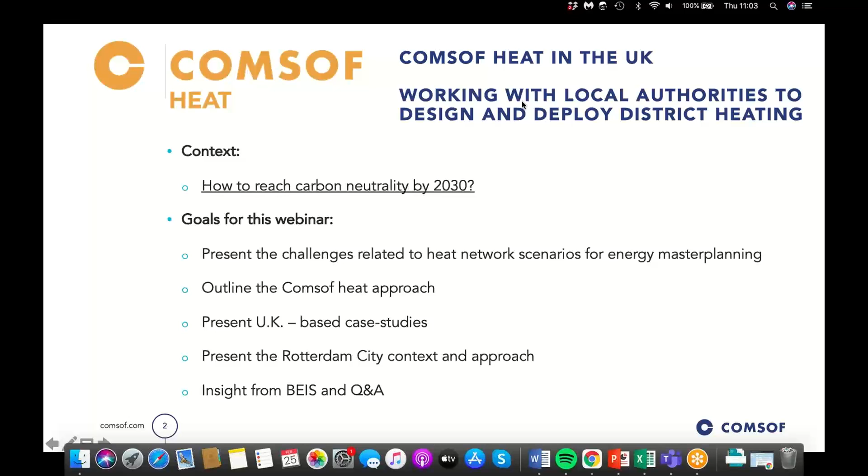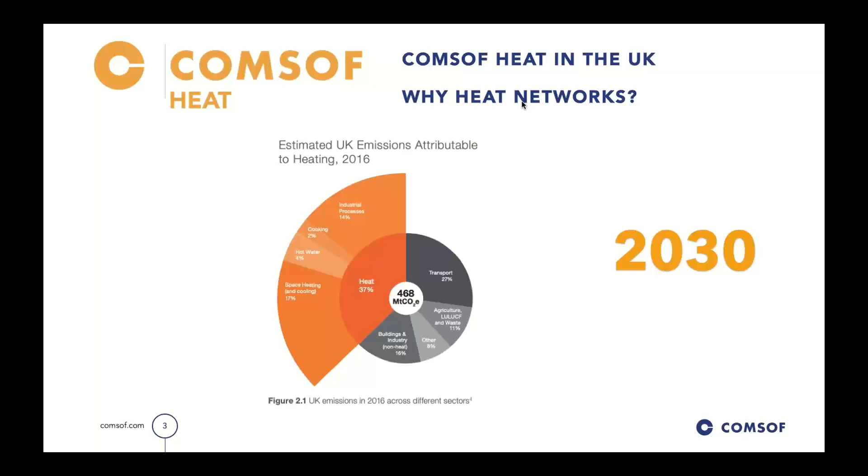So in the UK, heat accounts for over a third of all emissions. Space heating and cooling is 17% of that. And once again, that really does put into context how important it is that local authorities and the economy as a whole decarbonizes. And if we think about 2030, if this decade of ours was a 10-round boxing match, the first round's done, and unfortunately we were all a bit on pause. We now need to move ahead with some level of swiftness to start really making a difference, and that can be done in many ways.

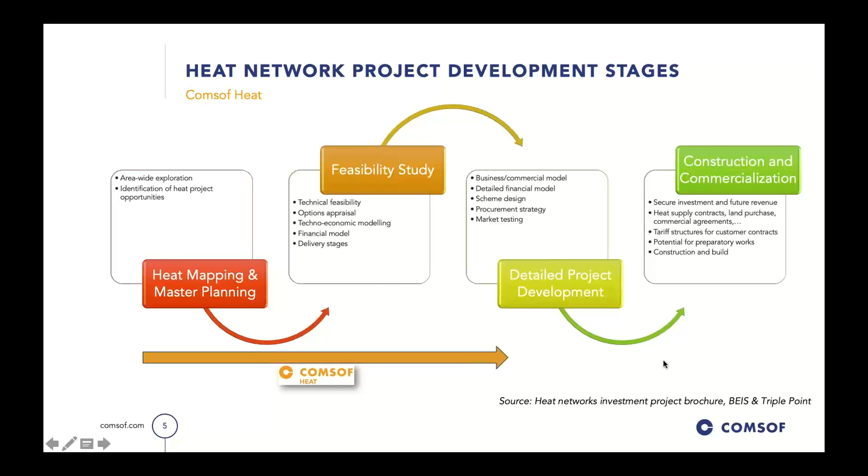Next, please. So if we look at the heat network project development stages, and this is a diagram from BEIS, we see the first 2 stages, heat mapping and master planning, and feasibility study, that's where Comsof is very valuable. And if you click, you will see the animation. So Comsof is there in the beginning, the first 2 stages, and it can also serve as an input for the detailed design in step number 3. So next slide, please.

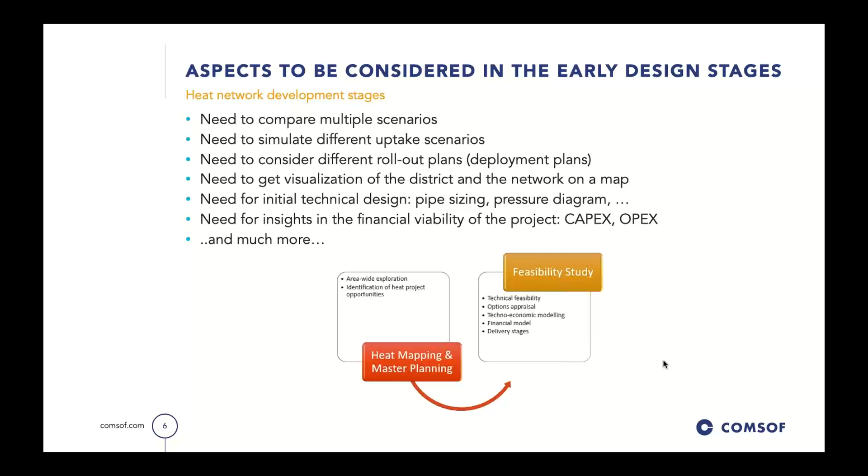So if we look at what needs to happen in these stages, basically you want to compare multiple scenarios, simulate different uptake scenarios, look at possible rollout plans. You want to have good visualization, you want to design your network. So this is all possible with Comsof Heat, as you will see in the case studies that Ben will present.

Now, what are the alternatives? How do engineering and consulting companies, which I've talked to, work? Of course, not all of them do it in this way, but typically they have some kind of in-house development of a tool for sizing, for planning, for cost calculation of a new network based on Excel, maybe with some Python development, some minor GIS integration.

So we have tried to bring it all together in one tool, make a scalable tool. Scalable means it can serve for small projects, let's say 30, 40, 50 buildings, up to 100,000 homes, as you will see, which is a case in Rotterdam, but also scalable in terms of training extra people to get on the software, to work with the tools. So you can easily train multiple engineers in your organization to start using the tool.

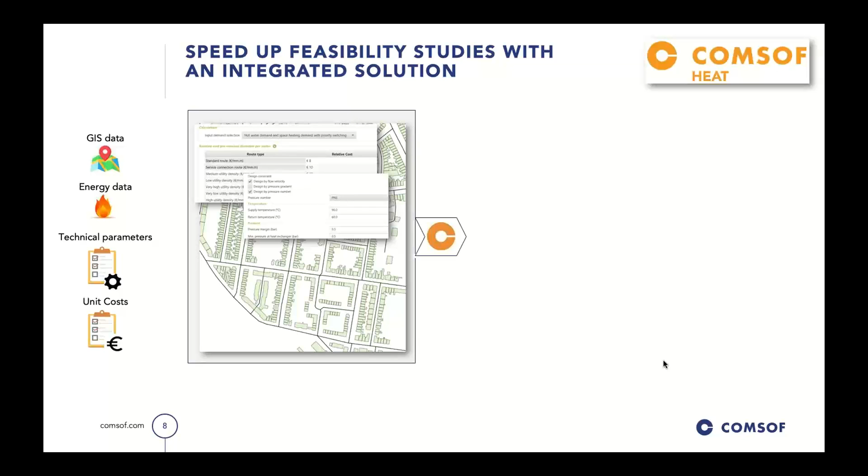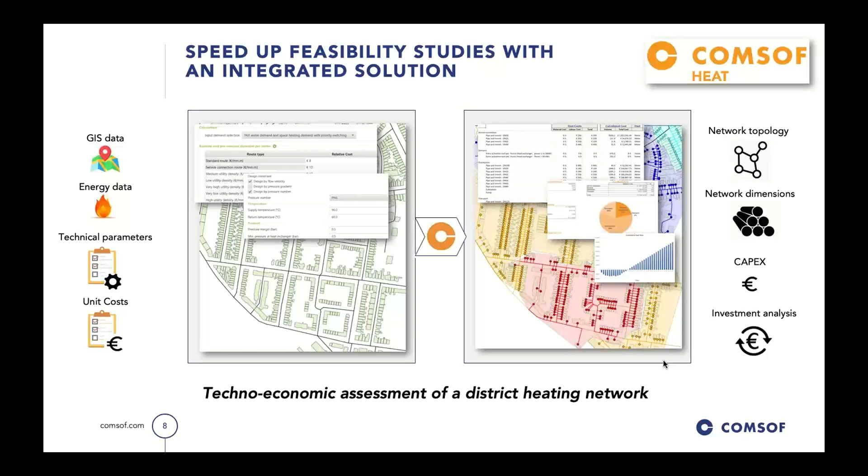So as an input, what do we need? We need GIS data, energy demand data, technical parameters for your design, unit costs if you want to calculate a deployment cost, and that's a starting point. Then what will our tool do? It will generate the network topology, size the network, calculate the deployment cost, and if you want, you can also look at investment analysis of a project over a period of 30, 40, 50 years. So in fact, it gives you a techno-economic assessment of a district heating network.

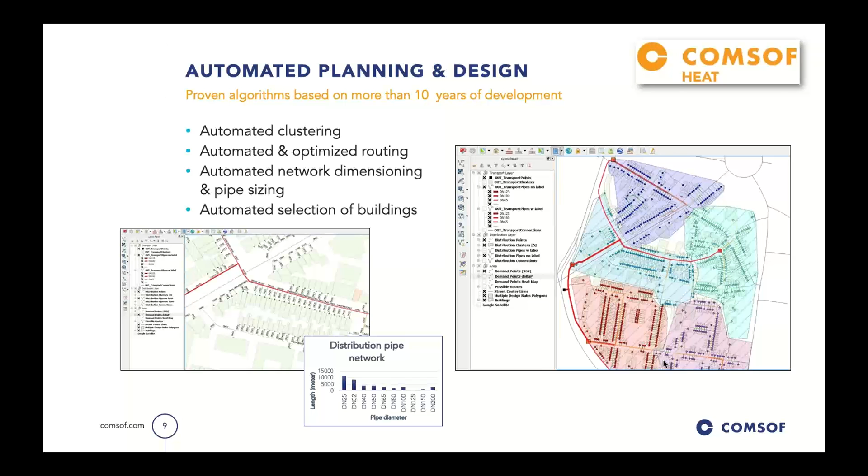Next, please. So what is in fact automated? If you look on the right side, the clustering is automated. So you can cluster groups of buildings together to get a certain power for an energy center in a certain area. You can cluster a number of homes together. The routing is automated and cost optimized, plus the sizing of the pipes is fully automated. So it's quite fast in generating a new design. A design, as you see here on the right side, is about 1,000 or a bit more connections. That is generally done in less than 5 minutes.

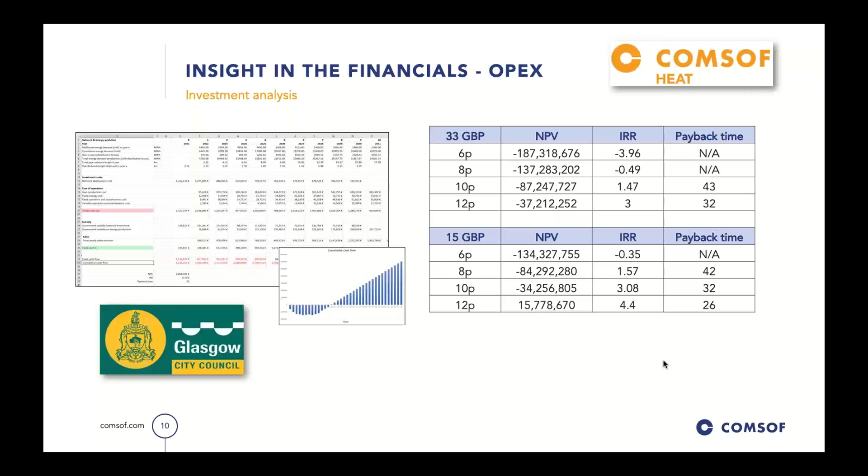As I mentioned, you can easily compare multiple scenarios, and here is a nice example of a project where more than 50 different scenarios have been calculated, all quite fast. As you see, 2 to 5 minutes per scenario calculation to really look at a sensitivity analysis of multiple parameters and come up with a kind of an optimal design to take it forward.

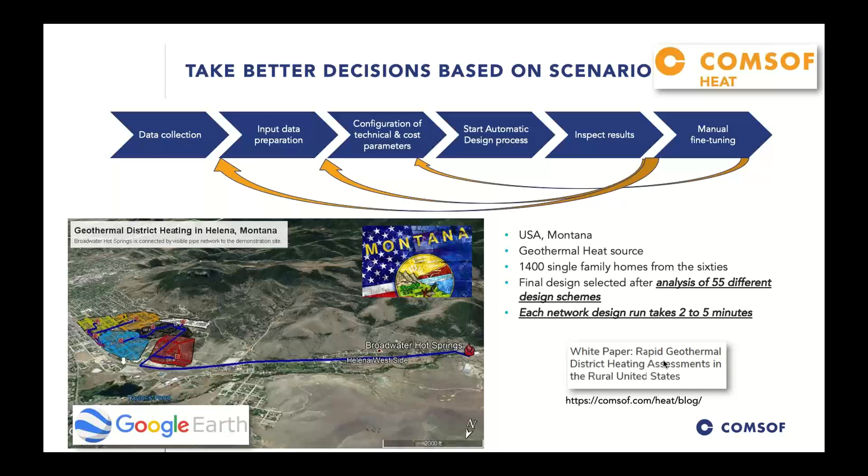Comsof Heat comes as a plugin for GIS tools. We currently have 2 plugins available, but we are open for integration with other tools. We have an integration with QGIS and with ArcGIS Pro. QGIS is freeware and easy to get started with. ArcGIS Pro is commercial software and offers, of course, more functionalities, but both are available.

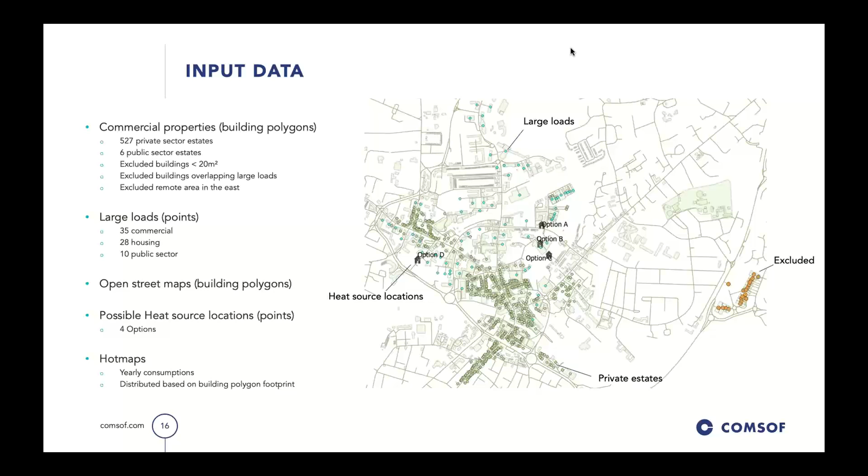We didn't try and define the heat source at this stage. We just thought, what space is available within Chelmsford to place those heat sources? So it's very much just having some interesting, broad, open conversations about what could be possible. Okay, and then we added in the technical parameters, which is part of the process. Now, these technical parameters can be very, very definitive, or they can be broad.

In this case, we looked at the temperatures, steel pipe system, the pressure involved, diversity or minimum simultaneity, or the coincidence factor. So that's essentially diversifying your overall heat load, so you can say, well, we're not going to have all of the heat demanded all at the same time. So that helps us bring down the total peak amount.

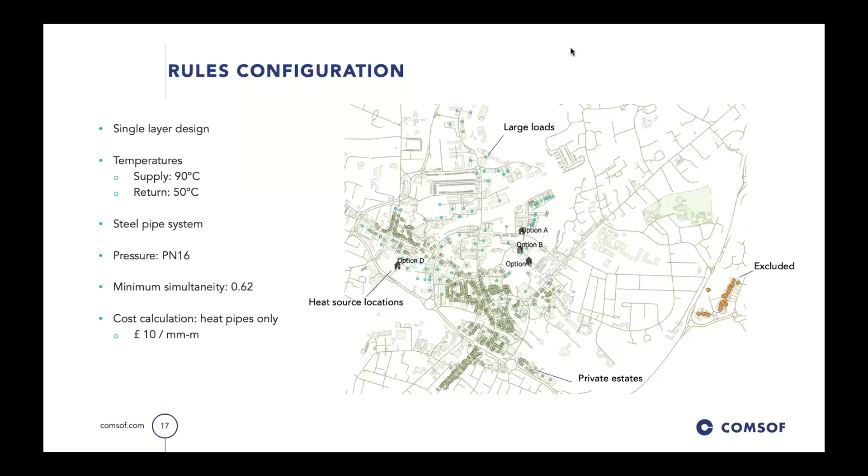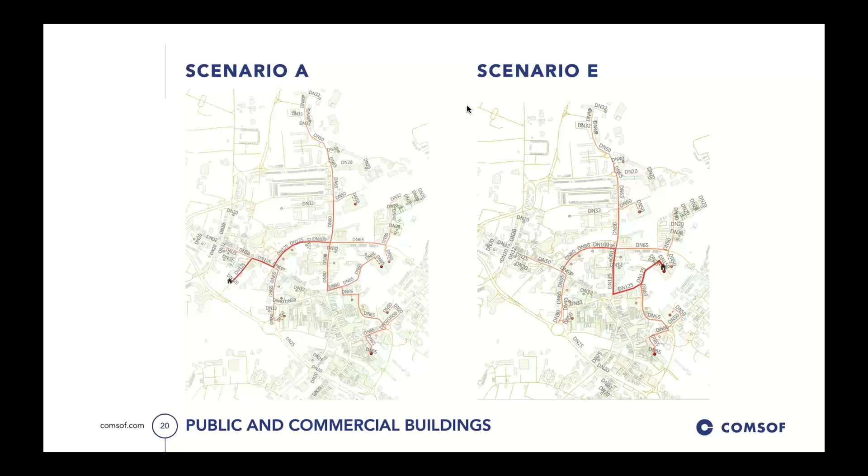And it's scenario A and scenario E, because what we did is we looked at the implication in terms of relative heat network pipe cost and scope, if we had the heat source in area A or in area D. But it was also specifically just for public and commercial buildings. Why those buildings? Because it's a fairly straightforward assumption that these perhaps would be the buildings that would be most easily convinced or most easily driven towards connecting to a heat network.

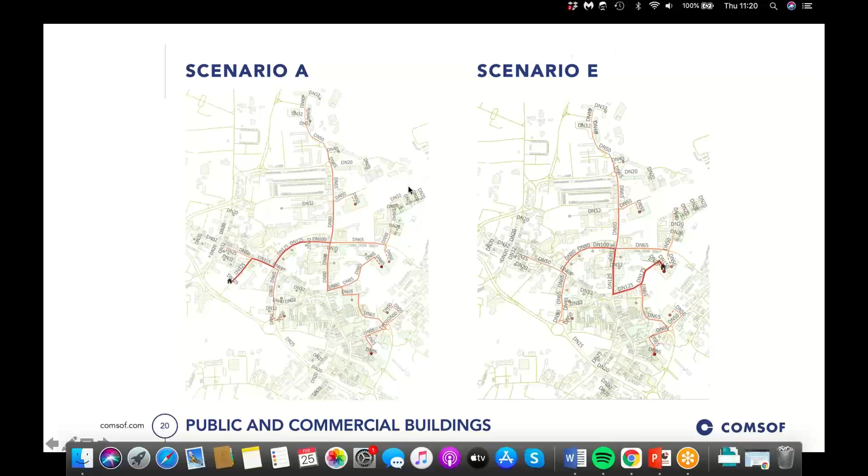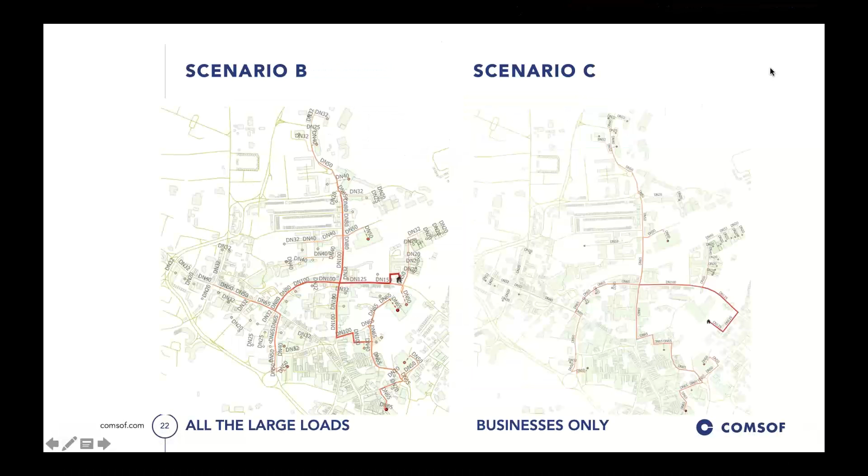And then we looked at B and C. So we said, okay, let's look at it slightly differently. What if we just connect all the large loads that we were able to draw out from our Hotmaps EU data and compare that with just businesses? Maybe there's a specific strategy where you're just capturing the businesses. And then this helped us produce these maps.

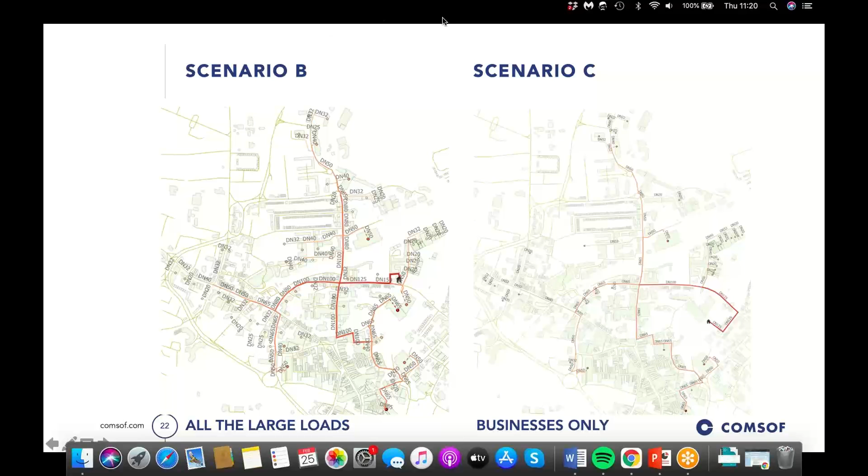And so you can see on the left-hand side, you've got bigger pipe work because you are having to drive more heat through that pipe work. And on the right-hand side, businesses only, you see you've actually got quite an extensive heat network in terms of the length of the pipe work, the extremes that you have to go to hit all them. But it's actually quite a small heat network in itself.

And then we were most interested to see what happens if we went big and we included all of the private sector estates, so included all the households as well. And here you can see that across the piece, we're increasing the number of demand points, the number of buildings substantially. We're increasing the network length,

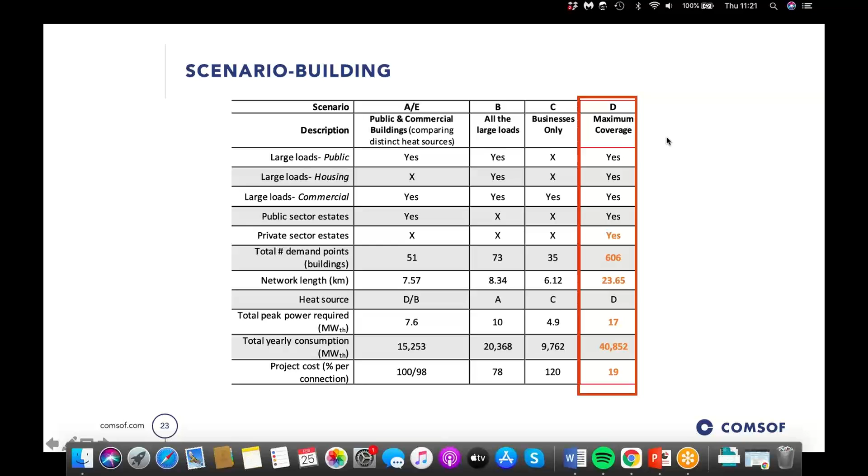but also, while we're increasing the number of buildings by almost 10 times, more or less, the network length, the total peak required, the total consumption doesn't go anywhere near that same factor of increase. And indeed, the project cost, that benchmarking piece, the percentage cost per connection, is substantially less as we go big. So returns to scale are evident there. And this is what it looked like.

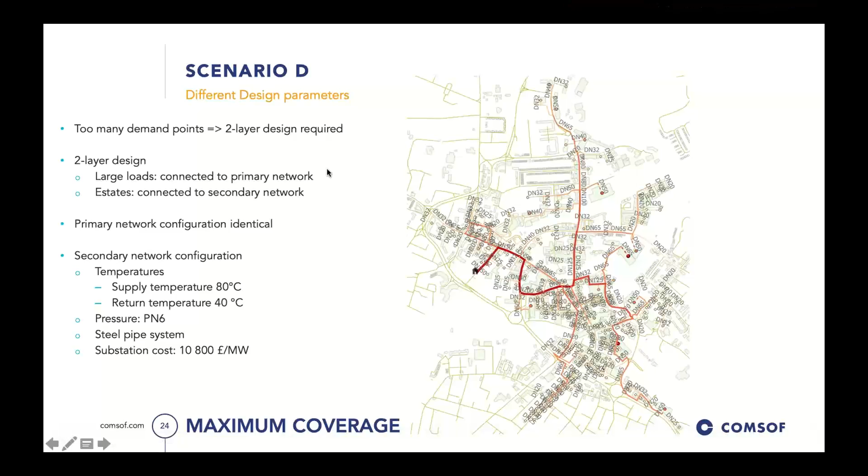In this case, what you have to do is you have to develop essentially two network designs. You have the transport section, which is the main heat coming from the heat source through to the different parts of the heat network. And the second layer is what we call the distribution section. And that is denoted by having clusters of smaller heat networks that are connected to the main transport pipe work. And then we went through that process again.

And I think this is really the gem of Comsof, because it allows you to get to a stage where you're having a discussion with other people from different competencies, technical people, not so technical people, money people, planning people, legislative people, whoever it is, and you're able to have meaningful, interesting, and insightful conversations quickly, and you can refine it and then feed those inputs, those ideas, those suggestions back into the model.

So we said, listen, let's go big. Let's see if we can push this go big, this maximum coverage narrative a little bit further. So we said, what about adding in some low carbon heat? So we've added in a river source heat pump that can deliver 10 megawatts worth of heat.

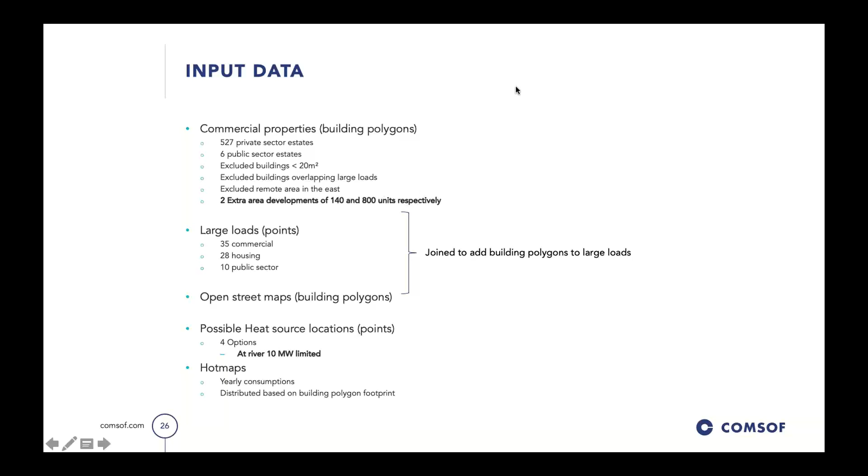And we were informed by the people at Chelmsford that there is a planned new build household residential development that we decided we were going to include as well. So we said, well, why not go a little bit farther and extend our ambition a little bit? So this is what that looked like.

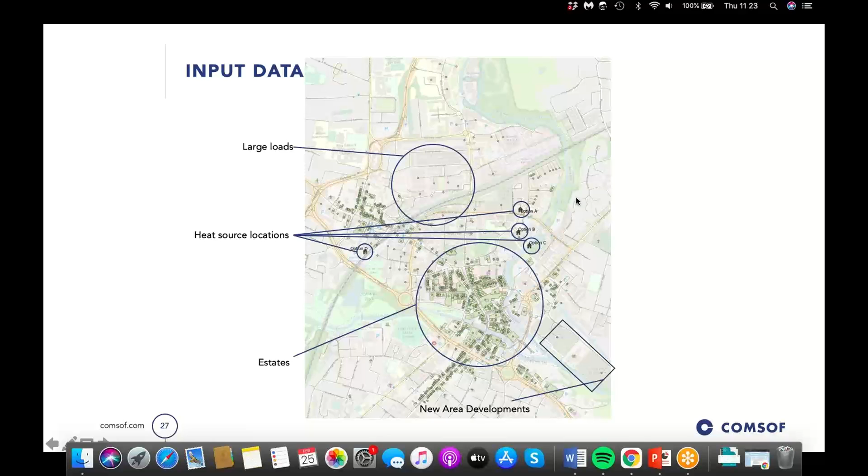You can see in the area here, this was the original city center. We've got the large loads over here. We added in option C, which is the river source heat pump, and we've also kept this heat network here, heat source here. And then the new developments that we'd not included in the previous scenario. Once again, added in our technical parameters, what sort of supply temperatures, pipe system, the pressures, the diversity.

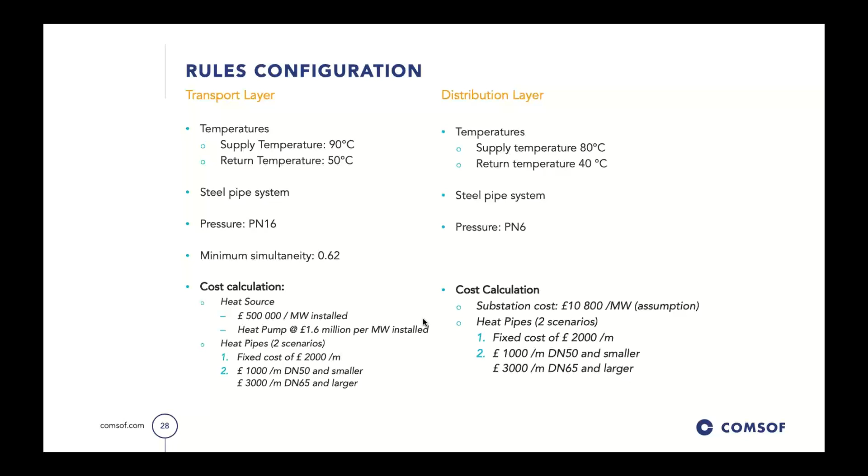And now the other thing that we wanted to assess was the cost implications of adding in the heat source from the river source heat pump, and also comparing variable pipe pricing based on the size of the pipe, the price per meter, versus just saying we're going to have a fixed price per meter of heat network installed.

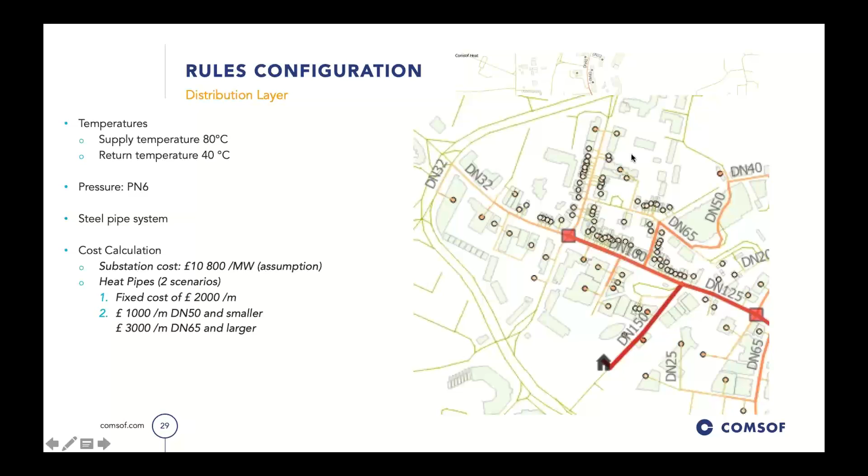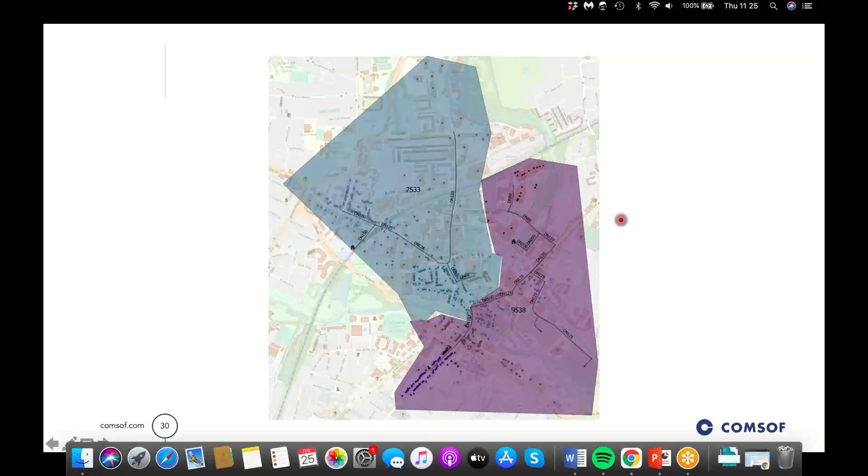And then we were also able to bring out which areas, which neighborhoods are served by each of these substations. So you're beginning to really visualize what's happening, how it would be built out. And you can also add in a functionality of planning, which we'll see in the next example in Glasgow, of how you can plan out the deployment phases as well.

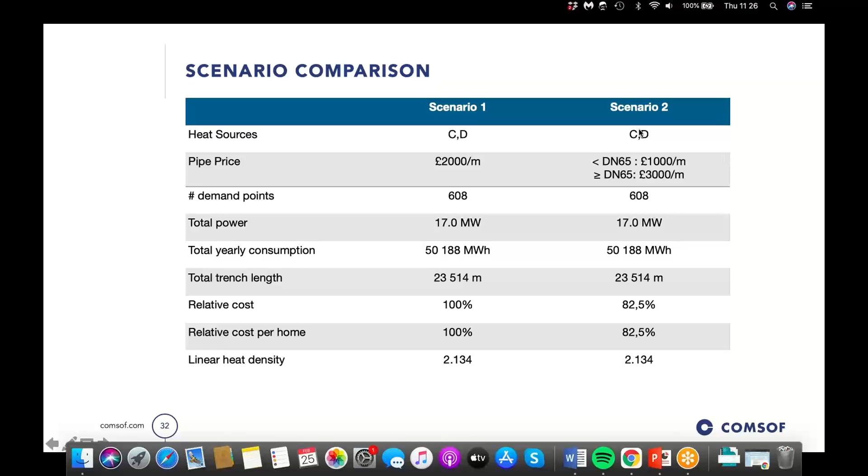So there, once again, we're highlighting in colors the substation, demonstrating which neighborhood is being served by the substation. And we're able to benchmark and compare the two scenarios, and we can see that, let's just assume we have £2,000 per meter of pipe work in scenario one, versus this variable pipe sizing, whether you're larger or smaller pipe size diameter. And once again, if those numbers were specific, correct, we will be able to see a tangible impact on the overall cost, once again informing and providing confidence and information to decision makers within the area.

Okay, I'm going to run through this one pretty quickly because I want to make sure the guys from Rotterdam have got their time as well.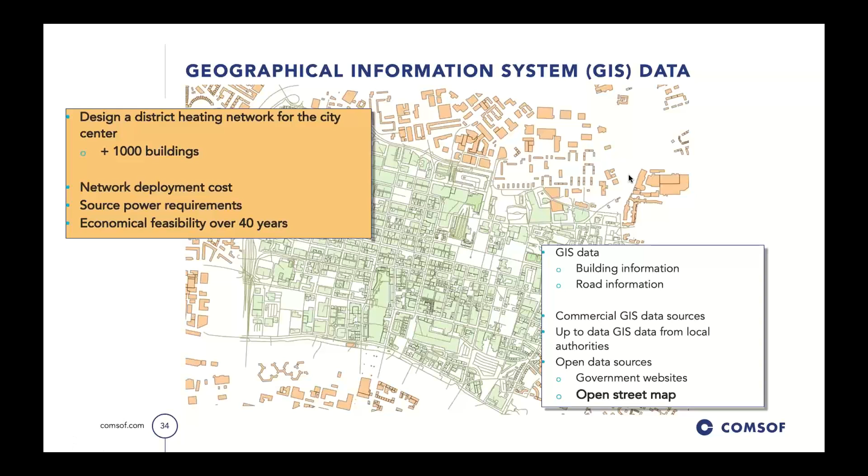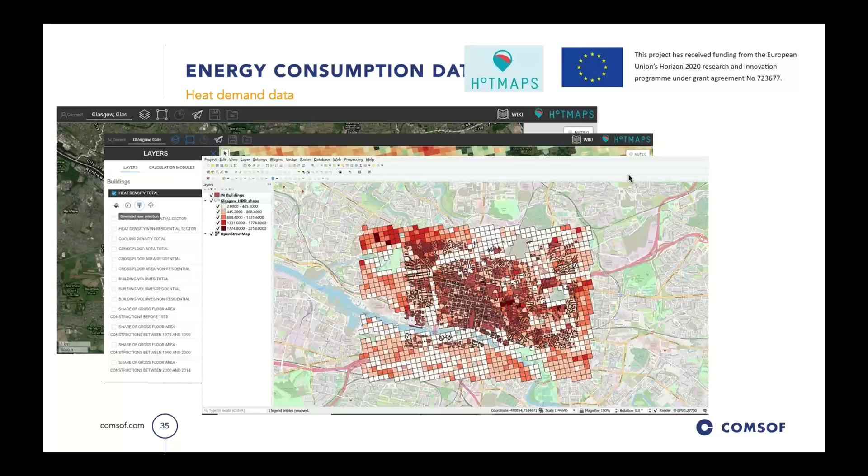But once again, we looked at Glasgow, and we wanted to say, okay, well, what about a larger scale city centre heat network? Once again, they've declared this climate emergency. They've got this challenge, carbon neutrality by 2030. How viable is that? So once again, we went through the same process of building up the map using OpenStreetMaps and hotmaps.eu to give us our starting point. We grabbed all this heat map data here, and then we started to refine it down to, once again, what we felt was a suitable first instance area.

And this is essentially the two scenarios we're going to look at. There's multiple iterations again within these scenarios, but the two scenarios we're going to look at is what happens if you have one big, large water source heat pump, versus having multiple ones. Well, with one water source heat pump, you've got to have a lot of booster stations, a lot of substations to help you along. And that could add a lot of heat, power load. You may have to have a lot of extra electrical power load to keep those substations going. It also may add in a lot more cost.

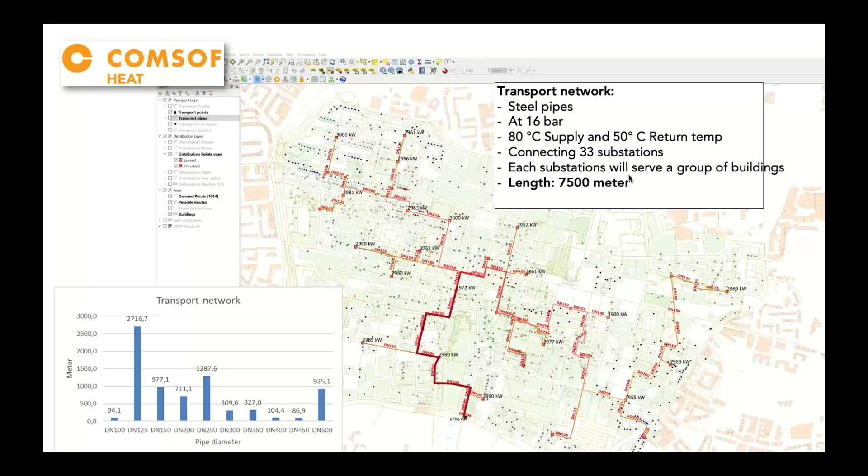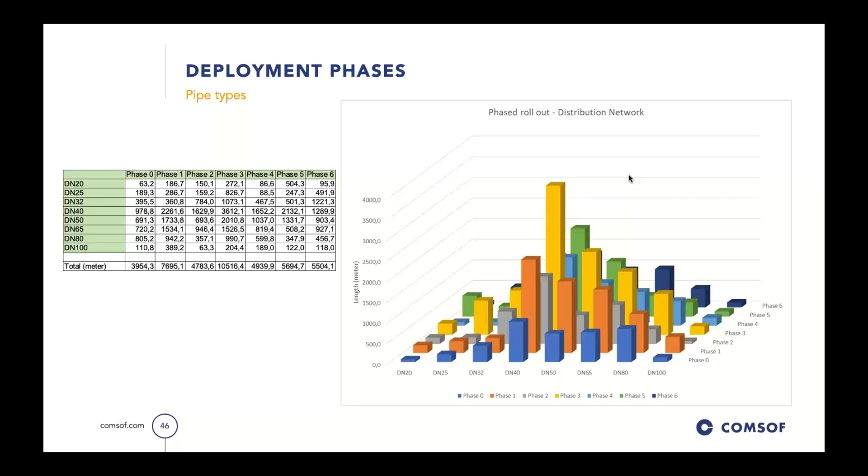But once again, we looked through this, we were able to build out a phased deployment scenario, demonstrate how the heat network would build out over time to try and meet this goal of carbon neutrality by 2030. And we were able to then demonstrate the cost, the amount of pipework, the different sizes of pipework, and we could also study the cost of this over time as well.

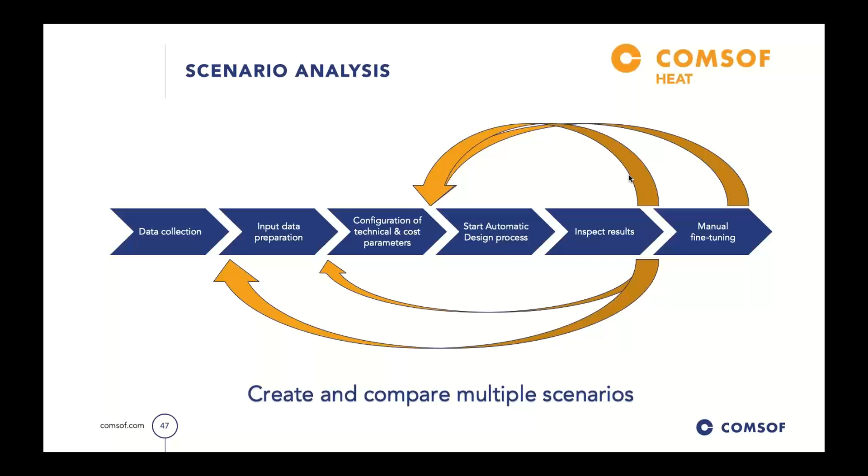We reviewed it and said, okay, let's refine it. And so we decided to say, well, actually, let's split this city into 4 sections and have 4 water source heat pumps, each serving an area of the city with water source heat pumps that are broadly the same size, and see if that could have an impact on the viability, on the cost, etc.

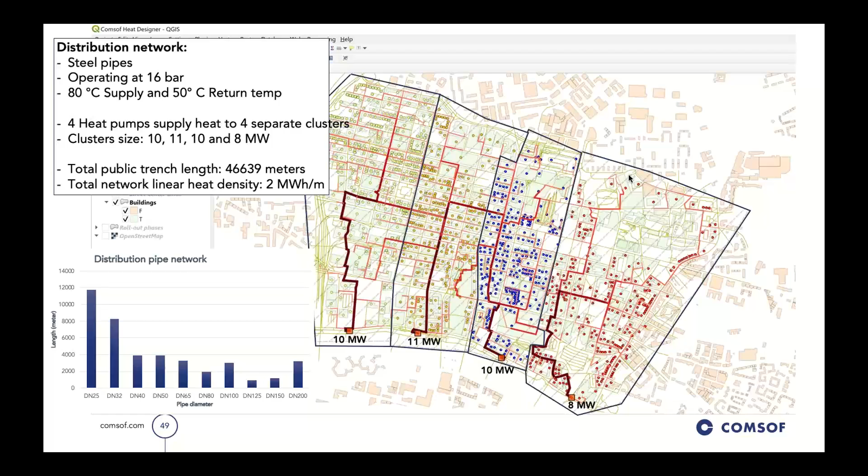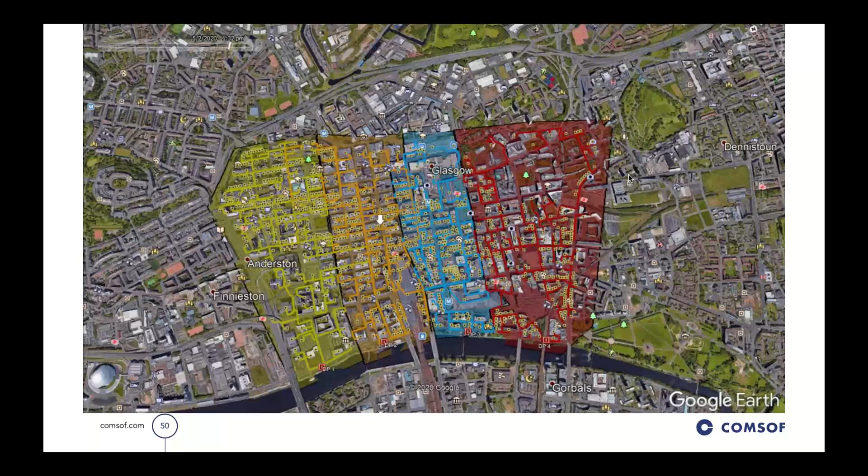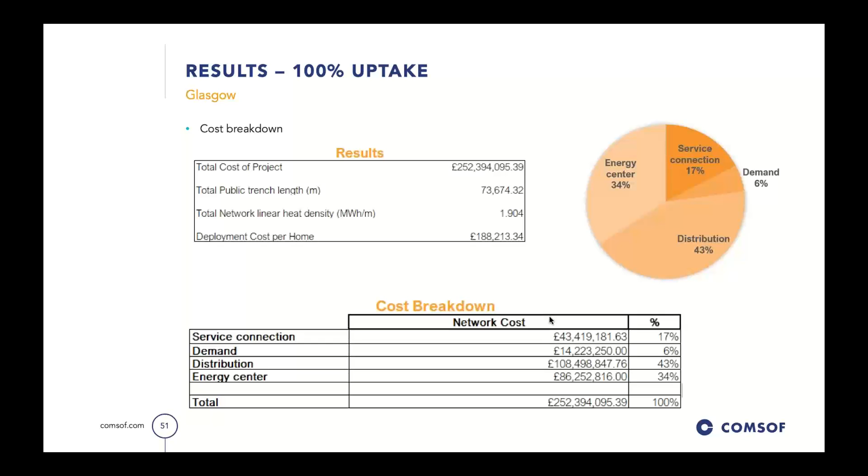And here's it by sections. So no need for substations anymore. All the power, the pump, etc., will be getting delivered by each of those heat pumps. We were able to have the financial analysis. We were able to break down the cost, the capex cost related to the different heat networks themselves. And once again, being able to build out that idea of how it could be deployed in a phased fashion.

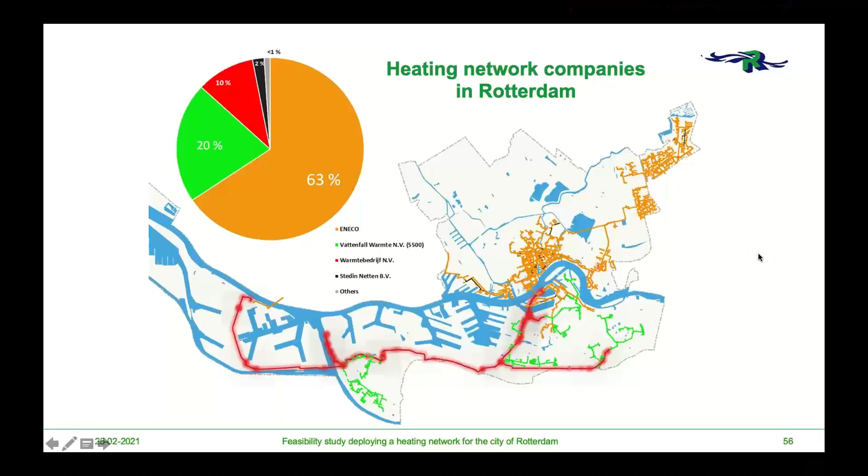Yeah, this is an example of how it's going in Rotterdam, but maybe also in other cities in the Netherlands, because it's quite a complex system of stakeholders involved in the district heating. So we as a municipality made an area concession for heating on the north and the south shore. So we have close contact with the energy operators, and these operators then have contractors, of course, to build the network themselves. They of course have to speak to the municipality about their plans.

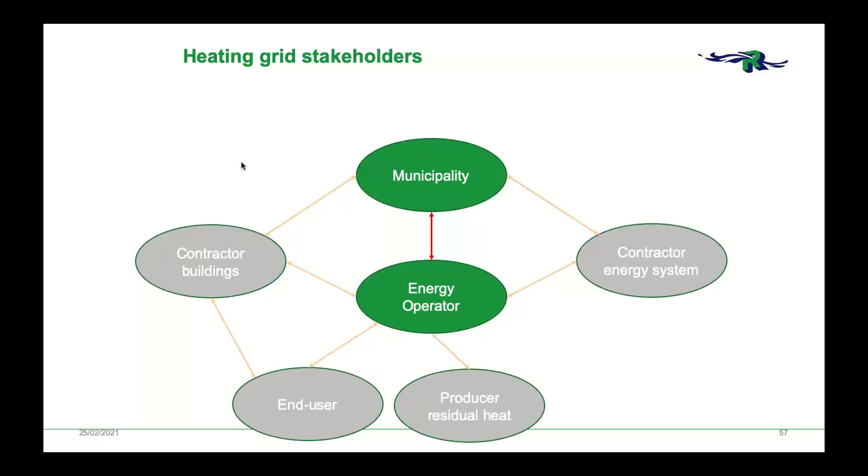And then we have the building projects, which also have to have permits from the municipality and work with the plans of the municipality. Then the energy operators themselves have to supply the heat to the end user. So they have to make the contracts with the end users, and of course also with the building contractors. Then we have a producer of our residual heat in Rotterdam. It's mainly a waste incineration plant. That's a private company, and also a Shell refinery that was connected a few years ago. And we have then the existing heating company in Rotterdam.

As a city, we have different stakes. So we also have the stake of legal affairs. So we also submit the permits for putting the pipes in the streets. So we have close contact with mainly all the stakeholders. So yeah, it's quite a complicated stakeholder system, I would say.

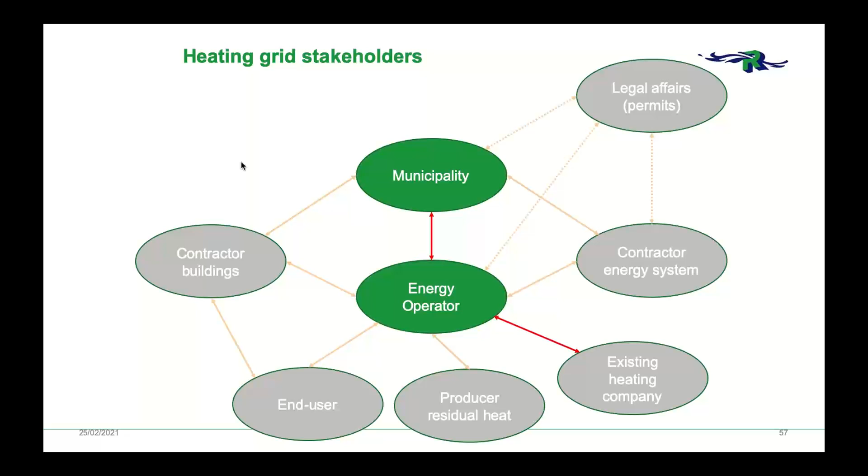And what's also interesting here, I think, are a few cases of how private and public ownership can be divided over the four different tasks of a heating network. So the first example is also from the Netherlands, where the producer is public, and actually every part of the system is public, so also the network operator and the supplier. That's the case in the city of Purmerend. Then we have a mixed one with only the producer of heat being private and the rest being public, and that's the case in Roosendaal, where the producer is Suez.

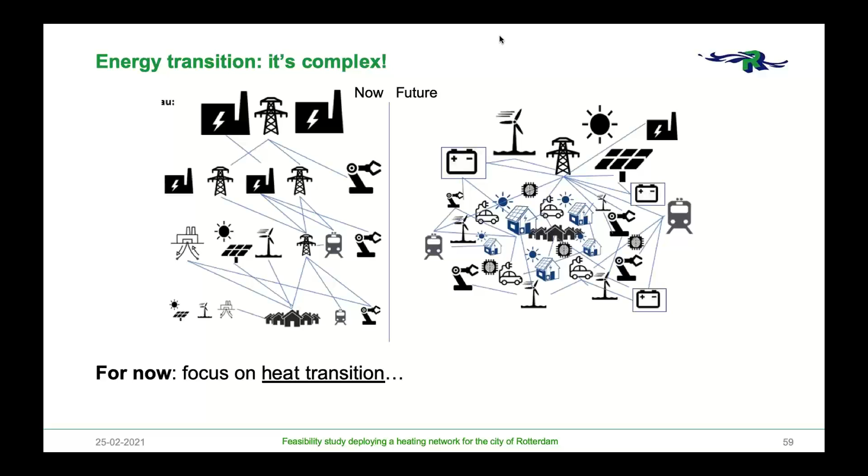So the network will change, and the meaning of this picture is only that it's becoming more and more complicated. End users will also be producers of energy, so that makes the network a lot harder to predict and more complex. Next picture, please. Yeah, just really in short, the heat transition in the Netherlands.

We had a political choice being made, I think it was in 2014 or 2015, where there were a lot of earthquakes in the northern part of the Netherlands. And then it was decided to get rid of natural gas, actually. I think we are the only country in Northwest Europe that has this ambition. So we want to be totally natural gas free in 2050,

where we have the largest natural gas network in the world. Almost, I think, 95% of all the houses are connected to a natural gas grid. So there's a lot of assets in the underground at the moment. So that is a big shift for us. And at the same time, of course, we met the Paris Agreement for CO2 reductions, to reduce almost 50% in 2030 and 95% in 2050.

And this year is actually a really important year for all the local municipalities, or the local governments, because each municipality has to submit their heating plans to the national government, how they will supply the areas in their municipality with heat the next periods. So more mandate is coming to the local government, and there have been in the last few years a lot of subsidies for pilot areas.

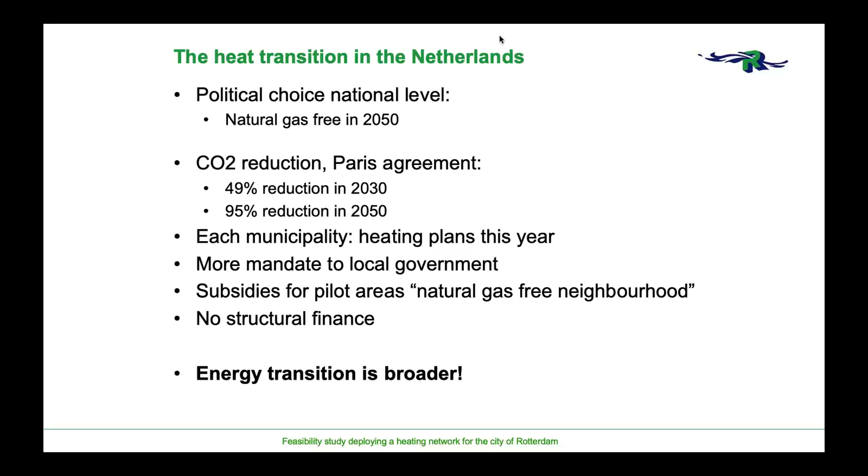It's almost 40 areas in the whole Netherlands that got a subsidy for becoming a natural gas-free neighborhood, but still there's no structural finance. So there's a lot of costs involved. So this is still a bit of a problem to get the whole city natural gas-free. And as I stated earlier, the energy transition is broader.

So in Rotterdam, for the heat transition, our main coordinator is the sustainability department, and our role from the engineering department is to have more of the technical details in-house. So we are a public engineering department. We belong to the city council, and we carried out at the end of last year a feasibility study with 14 areas.

We also coordinated external advising companies that contributed to this, and we used our knowledge from due diligence in every area. So in each of the 14 areas, we had a different person that was really the eyes and ears in these areas. At the same moment, we have 5 areas that are already in progress of planning to become a natural gas-free area. Some of these also got the national government subsidy, and 14 areas are now in the study phase. And the first area is going into realization at the moment.

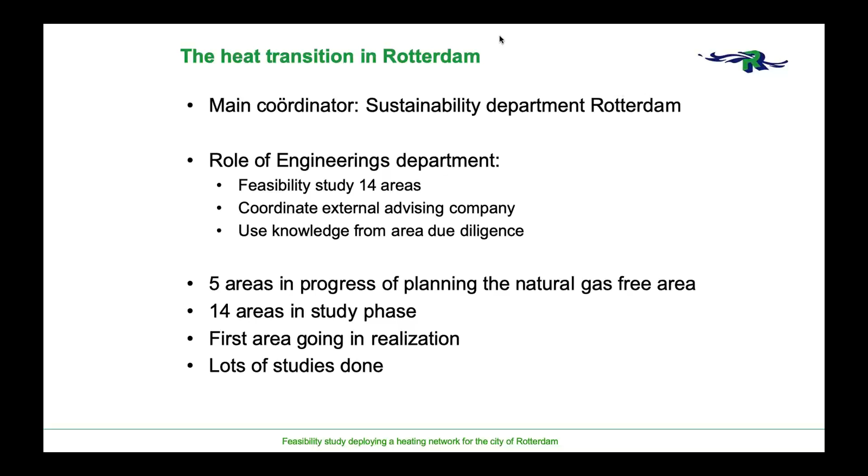And lots of studies have already been done also by external advising companies, because it's a huge task actually for us as a city. Next slide, please.

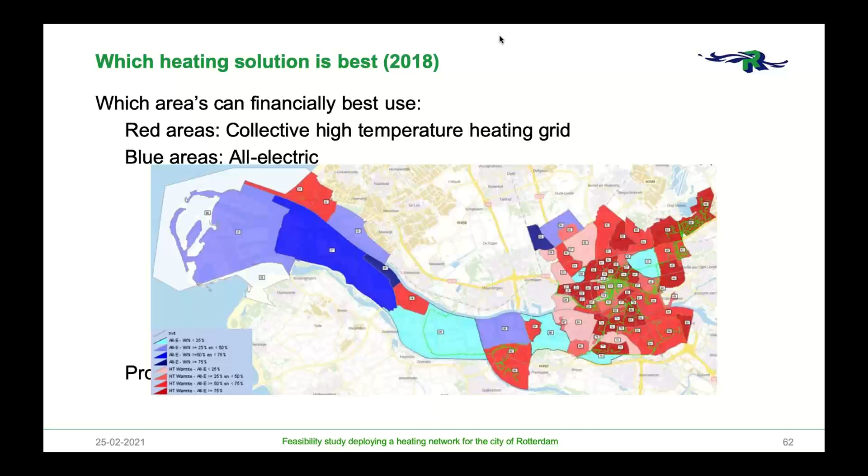In 2018, we made a map of which heating solution would fit best in what part of Rotterdam, from a financial point of view. And you see here the red areas are the areas around the city center and the more dense city area, where collective high temperature heating grids are really the main solution from this study. And the bluish colors are where the all-electric scenarios are more feasible. Next slide, please.

One is 100% of each building has to be connected, including the utility buildings. The second one was 70% connected. So these were the scenarios where each of the 14 areas could serve as a reference for all the areas. And then we made for each area, with the due diligence input, a customized scenario, what would be the best solution for 2030 for each area.

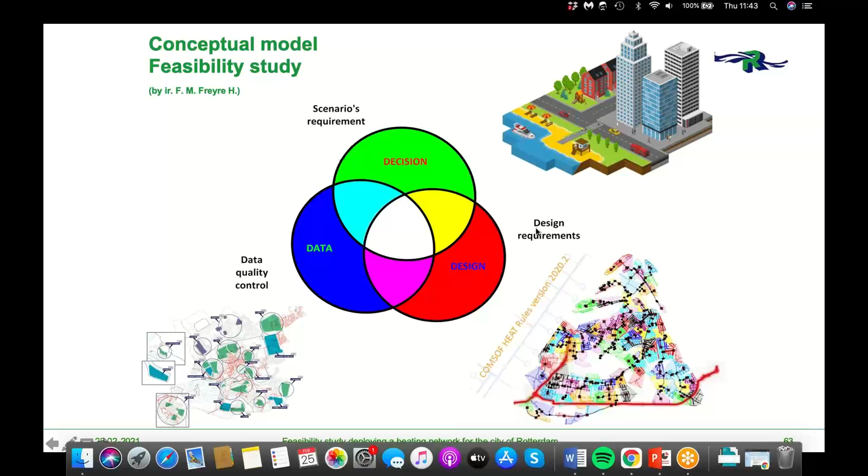So yeah, as I said, we did the due diligence on the best heating solution for 14 areas, and our study is actually input to update the map I showed from 2018, and we used Comsof as the main tool for this. So the financial parts and also the heating network design are actually 100% made with Comsof.

We found out that it's like an 80-20 or maybe even 90-10 division between data gathering and data quality control, and then actually making the design. So getting the data right was the hardest thing, to have it at the same level of detail for all the 14 areas. The 14 areas are roughly 100,000 houses, but in housing equivalents even 160,000.

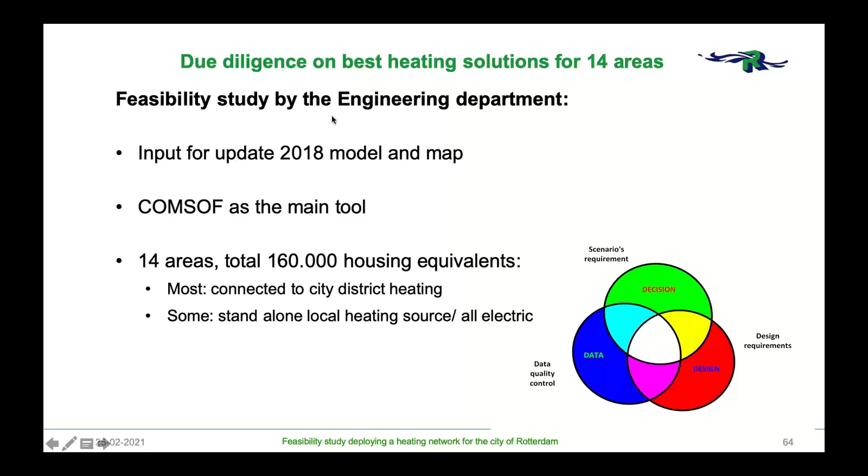And what came out of the study was that most of the areas will be connected to a centralized city district heating system, and some that were more remote in the city will have a standalone local heating source, or some all-electric areas.

And at the same time, the Comsof unique selling points are that it's, in our opinion, a market leader as a geographical and heating network tool, with also a nice integration with QGIS software. And the support, we found out, was really, really fast and to the point. So that was a really good one. And it gave us really good insights into the financial and investment costs of the heating network.

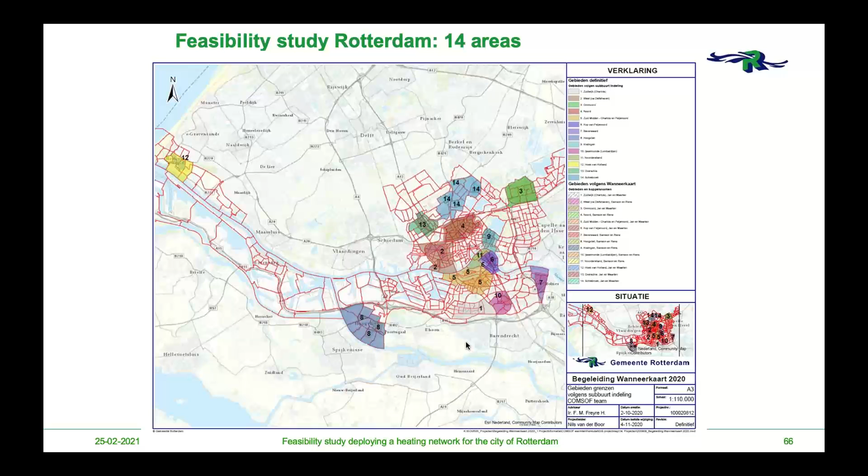Yes. Well, here you can see the 14 areas that we did in this feasibility study, with a strong belief that Comsof is the right tool for this job. We performed this calculation in Rotterdam, 14 locations, and that means at the end you will see that we produced a lot of maps for each area. We will go through this in the presentation. Well, these are all the areas with the amount of connection points.

The next slide, please. Well, within the whole project, we decided to look into it, and there are 4 starting points for this feasibility study. The due diligence was one of the most important parts of this, because it gives us all the characteristics of each area. The other part was the technical part, in which we go into the infrastructure and the integration of reality with the calculation. The third point was the business case, as my colleague said.

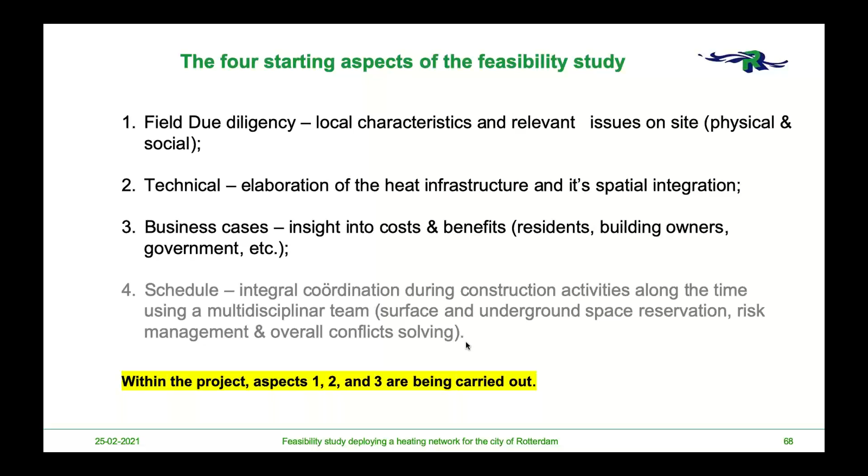And the fourth point is the scheduling of the engineering and deployment of the network. But in this case, this will be in the near future. So this was not in the project at this very moment. Next slide, please.

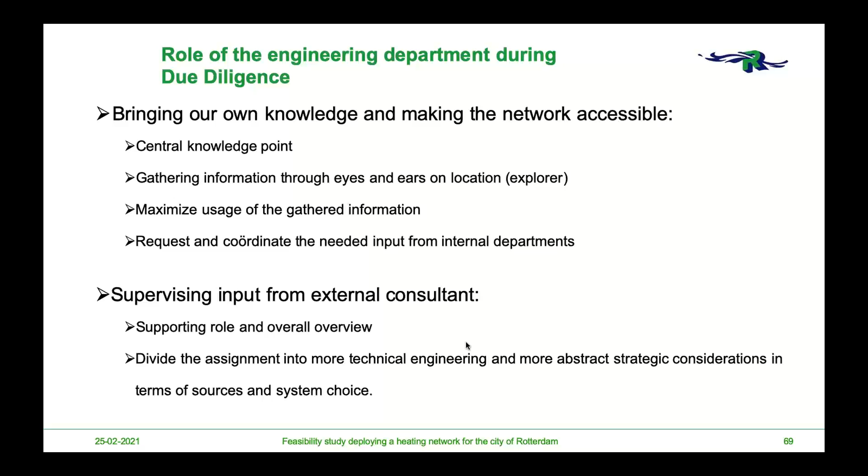So to do this, we had a role as engineering bureau during the due diligence, and the due diligence was to bring our knowledge in every place, to get all the information about this, and to maximize the use of that information in the analysis that we would perform for each area. And also, it was supervised by external consultants. So we worked together with private consultants. Next slide, please.

Of course, as you can see, there is a big process behind this. The next slide, in which we decided to do a kind of conceptual model at a high level of abstraction. And this is what you see here, in which you get not only the main issues like data, design, and decision making, but also the data control, the requirements of the design, and the requirements of the scenario that we apply in this process.

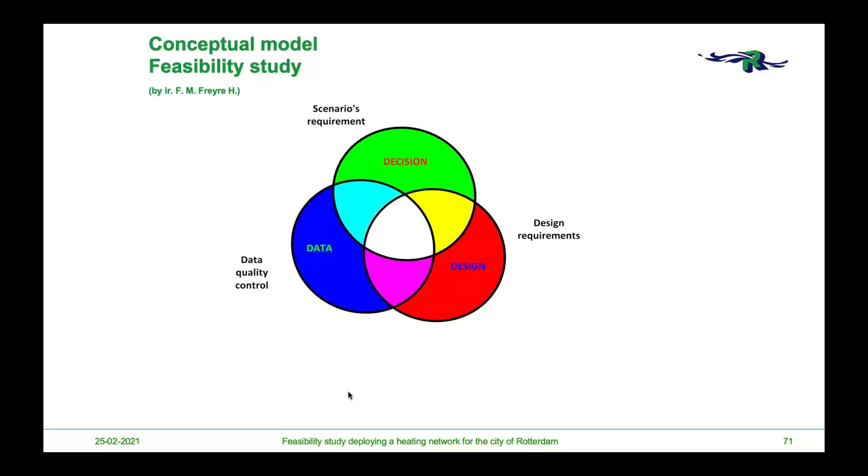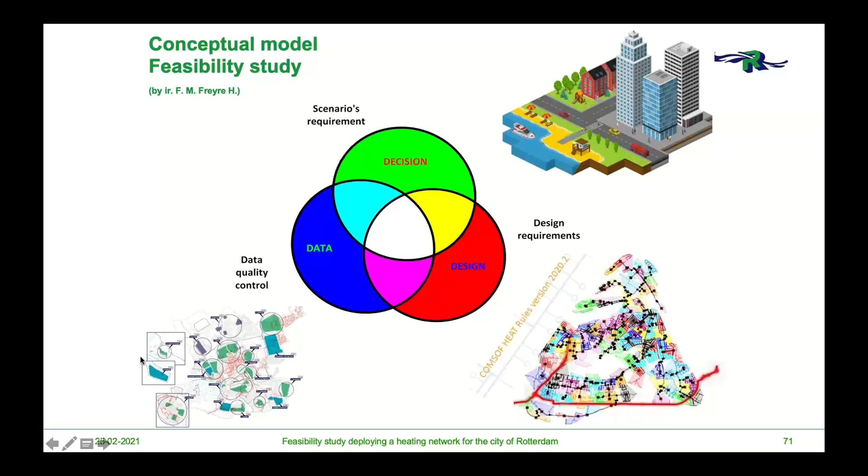Keep clicking, please. So then you have the location, you have Comsof, and you have the real situation. This all together gives us the dimension of our project. I will not go into depth, because it would take more time to explain this, but you can imagine how many things are going on in this conceptual model.

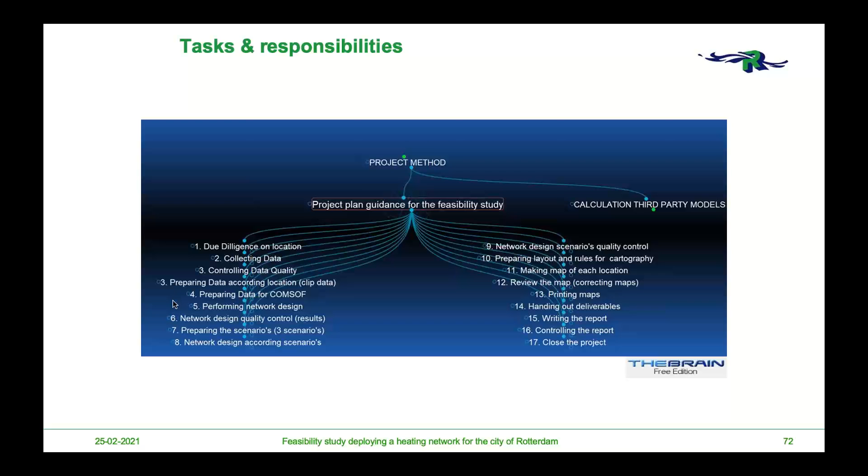The next slide, please. To approach this, we set up a project plan with guidance and steps. You can see there the due diligence, collecting data, controlling the quality of the data, and so on, until you get to the end of the project. But in some of those steps, you go back to check that what you are doing is correct. So the tasks and responsibilities were one very important issue in the whole project. Next slide, please.

So behind the project, in this case, you have a lot of people. You have a project coordinator, you have a secretary, and all other people that are part of the project, like a project advisor, technical advisor, due diligencers, that are people that were in the field, network design people, GIS people. So a lot of people. This project had more than 25 people involved. So we are here representing these people, and of course we are very proud of all those people, because we just did a part of this, but behind us were a lot of people busy with the whole project.

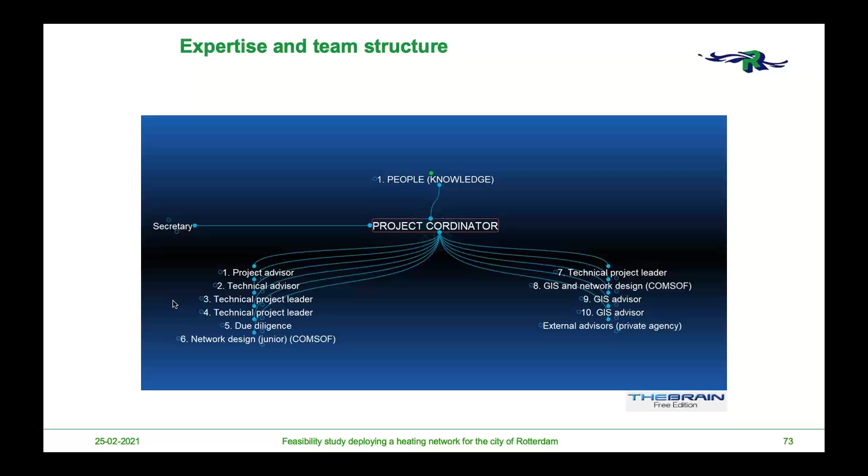And I have to add here that we were doing this during the first stage of the pandemic here also in the Netherlands, from March until November. So all the communication went through Microsoft Teams. So it was not physical. That gave us more stress because it's not the same. But at the end, we got through it, and well, we got the result. The next slide, please.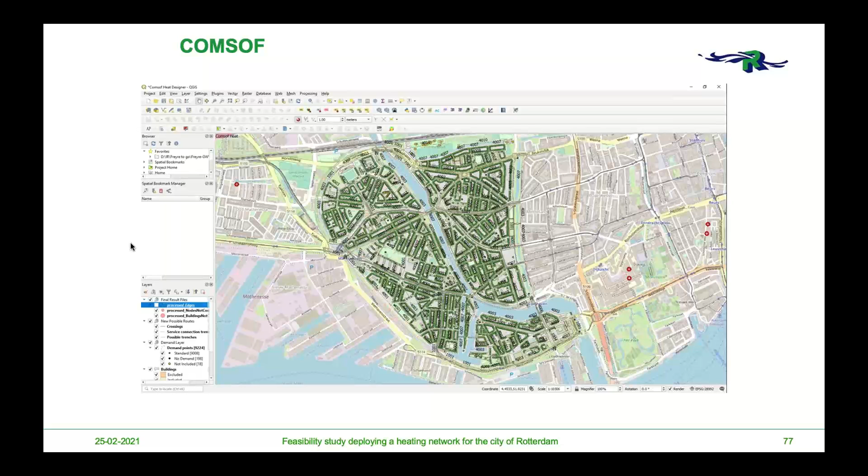So at the end, with all that work through all those months, we were able to come to the deliverable. So the result of our project, and in this view, you see one of those 14 areas. Next slide, please. So here for this area, you see mainly the result that comes out from Comsof, as I say, a screenshot. But from this screenshot, next slide, please.

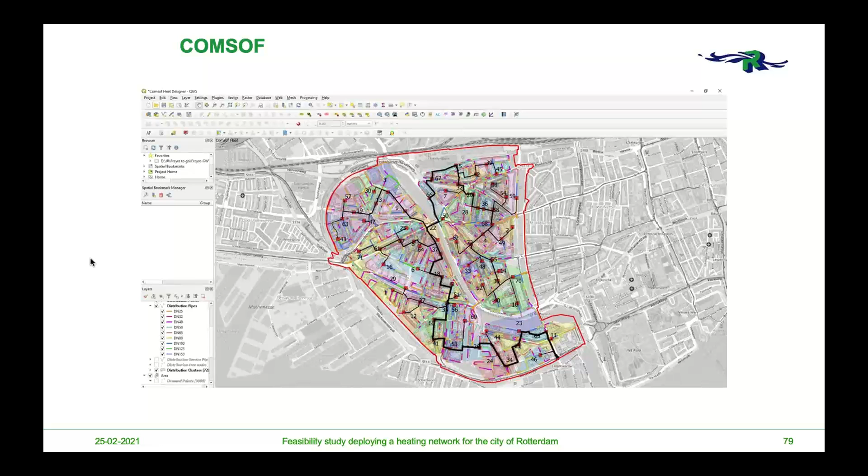We produced for all those areas 3 maps for each area. Sometimes more than this, because we had to calculate the areas 2 or more times to try to match the reality and also the scenarios. But at the end, using also the GIS and also agreeing inside of the team what we would present, we were able to present and to produce all those maps. So in this case, you can see all the connections, the transport pipes.

The next slide, please. No, you jumped.

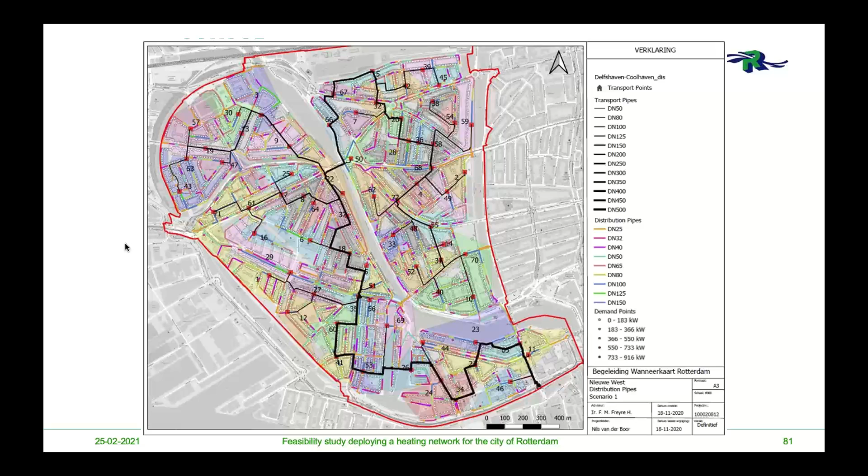And here, you have everything together: the transport pipes, the connection pipes, and the distribution pipes, and we also represent here the demand points, with the heating consumption. This information was also in our report, with the results of Comsof, the return on investment and also the technical reports. And this became the body of the whole project as the document.

What I want to add at this point is that the whole project was very tough, was difficult, because you have to talk with a lot of people and gather a lot of information. Some of the information is not quite good, or doesn't match the reality. That's why I say that management of the project is a very important issue. Communication is a very important issue. Be open minded, review what you are doing, and communicate with each other inside and outside,

with the company that was helping us, was a very important issue, and the result is now clear that Comsof was the right tool, and the composition of the project with the coordinator, a good person and open minded. So we went through this project in more than 7 months, and we got the expected result. And now we are waiting to go ahead to the next phase, and that is the engineering phase.